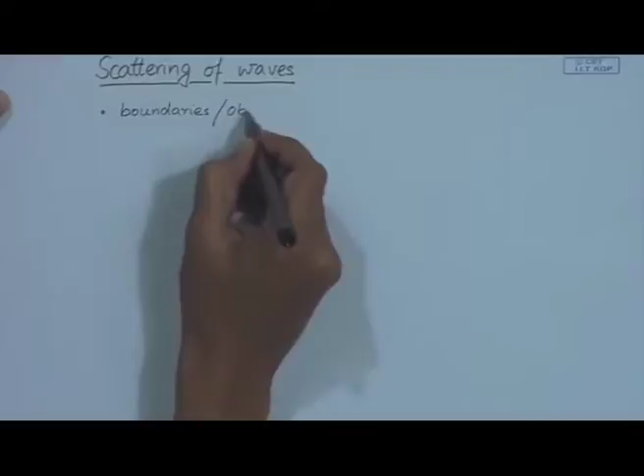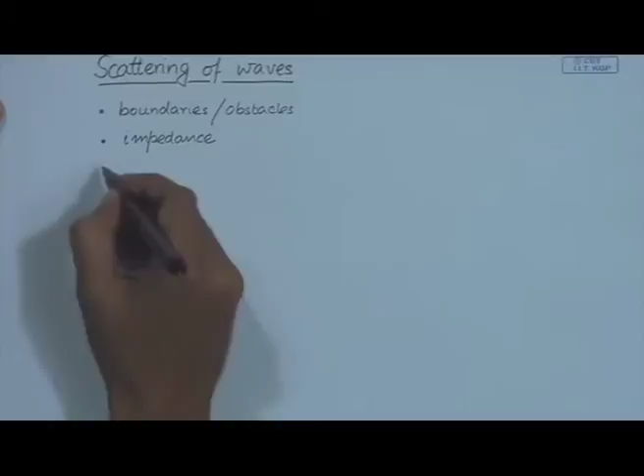So today we are going to look at this phenomenon of scattering of waves, and this will help us in understanding what happens when a wave front goes and hits a boundary or an obstacle or an impedance. So we are going to look at scattering of waves. Scattering can take place at boundaries or obstacles, at impedance - some finite impedances, let us say boundary damping - or it can take place at defects, which are defects or phases. When there is a difference of phase inside a material, then scattering will take place, and this scattering is of great practical importance for characterization and evaluation, non-destructive evaluation of materials.

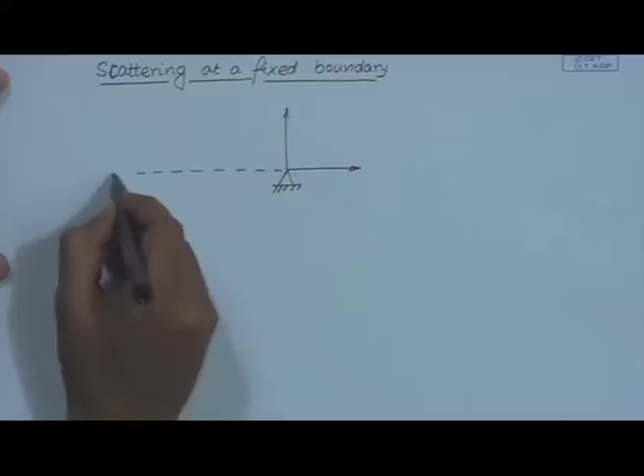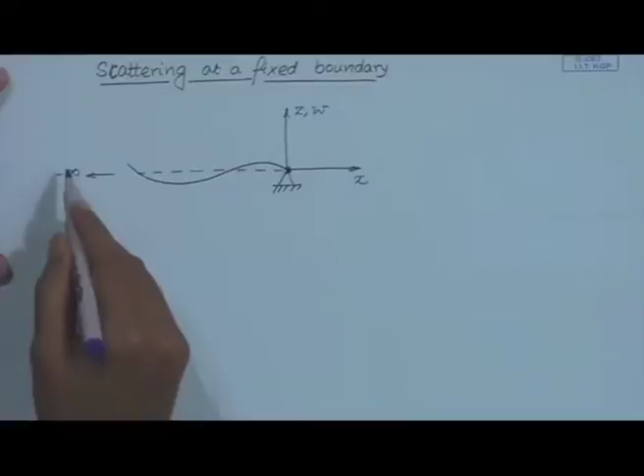So let us start with scattering at a fixed boundary. We will study this problem with the help of the example of a string, a semi-infinite string. So here we have a string which is fixed at this boundary, and we consider that a harmonic wave is incident from minus infinity.

So a positive travelling harmonic wave is incident at this boundary, and when this wave comes and hits this boundary, there must be a reflection, because the material ends here. So there must be a reflection.

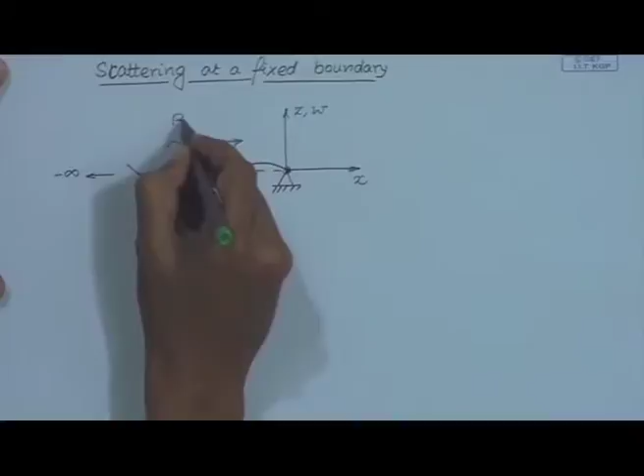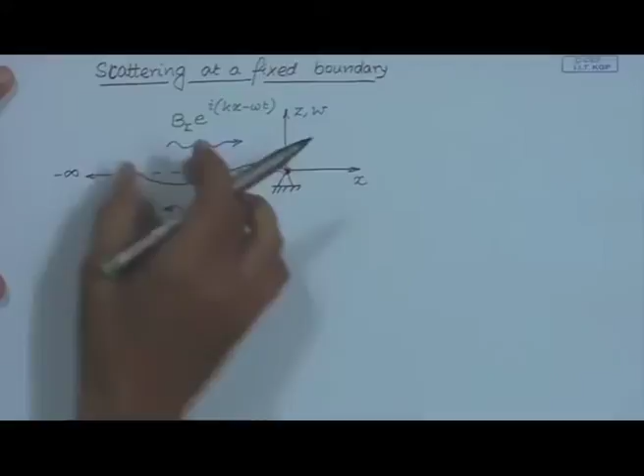Now we are going to consider an incident wave which is represented by this expression - this is the amplitude of the incident wave, and this is the space-time evolution. So this is a positive travelling wave.

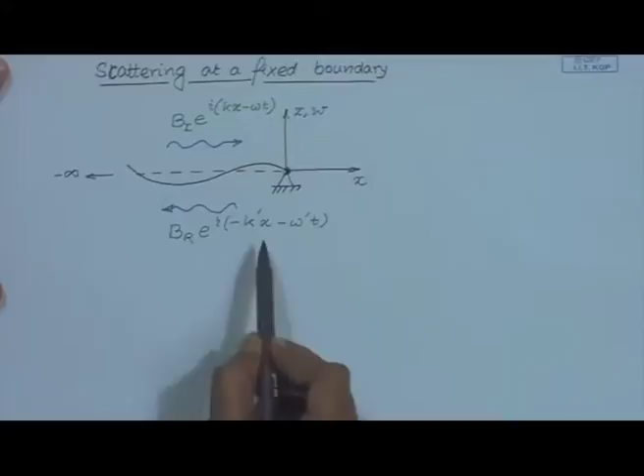Now when this wave reflects, let us consider that the reflected wave is represented by this expression. Here I have used k and omega for the incident wave, the wave number and the circular frequency of the wave, whereas for the reflected wave I am using k prime and omega prime.

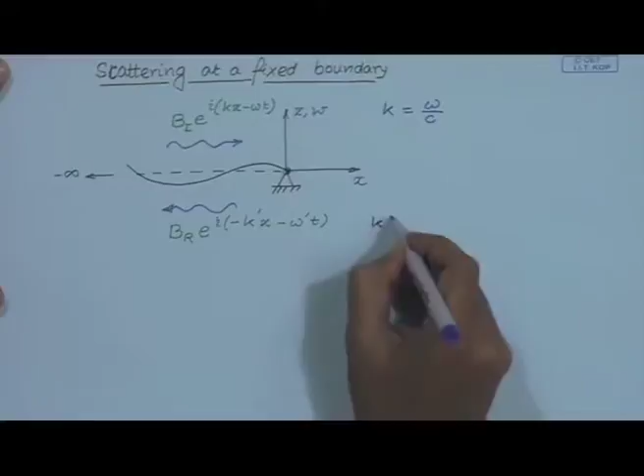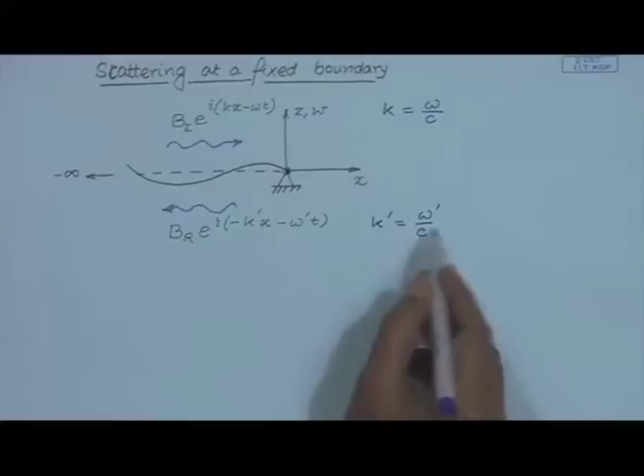Now this medium is the same, so we must have, as we have seen in our previous lecture, that k must be equal to omega over c, and similarly k prime must be equal to omega prime over c. Since the medium is the same, the wave speed in this direction or this direction must be the same, so the wave speeds must be the same. So k prime and omega prime are related by these relations.

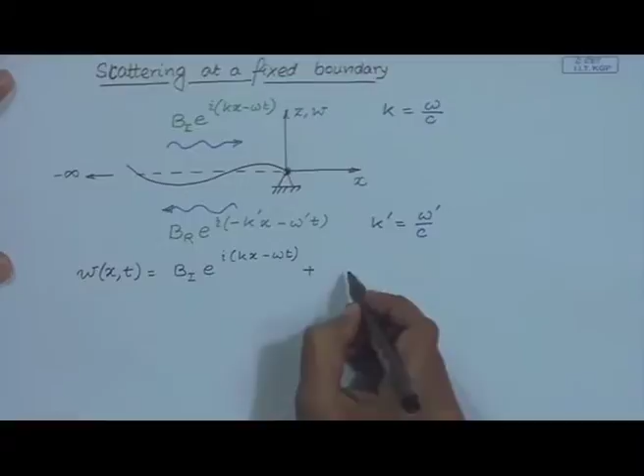So the total wave field in this string is the incident wave plus the reflected wave. Now what I am going to do is represent this amplitude of the reflected wave, which is B r, as a coefficient of reflection times B i, and there is this exponential part.

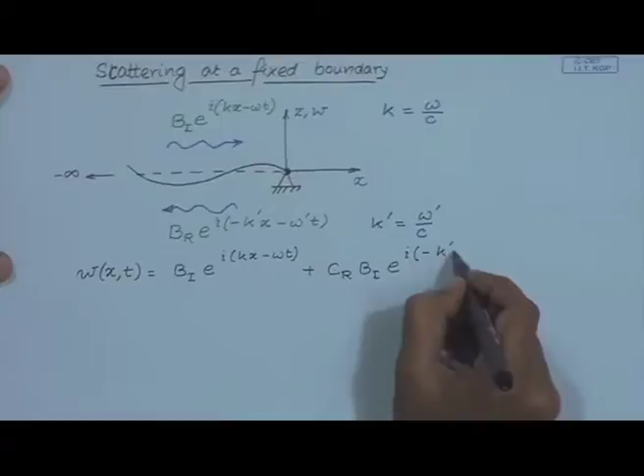So here I am introducing this coefficient of reflection. Now, the boundary condition at this fixed end is of course that this must be 0.

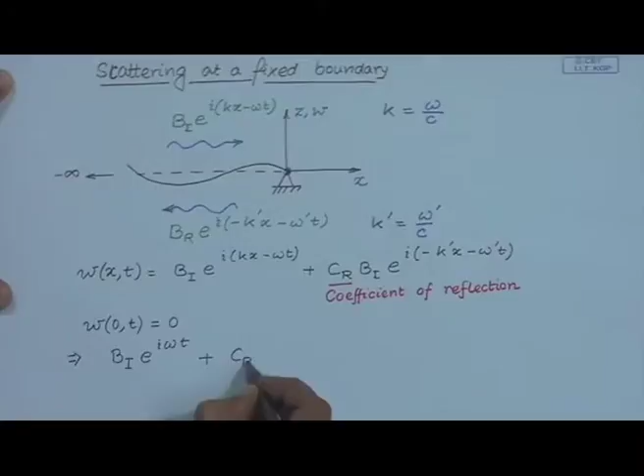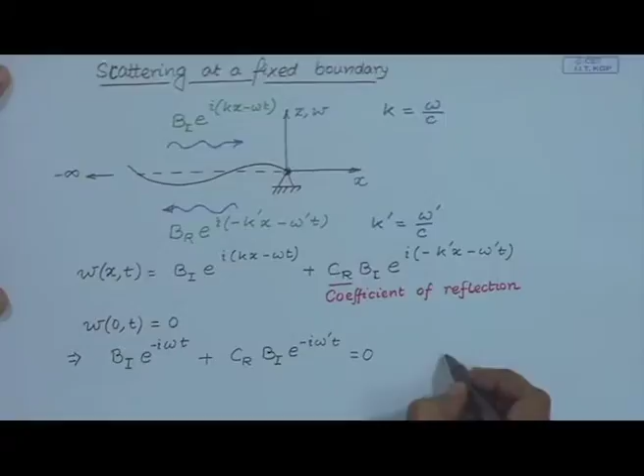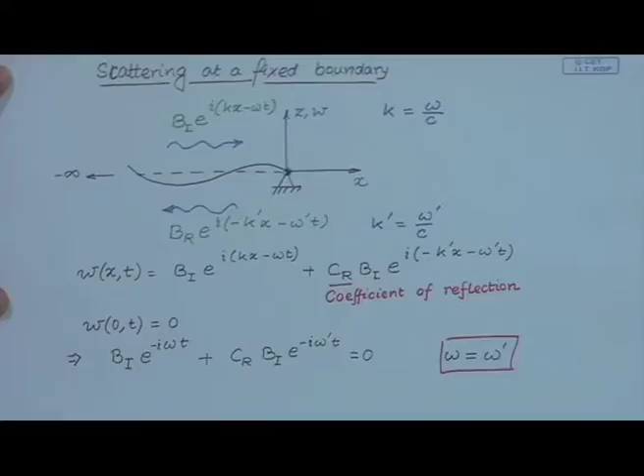So when I substitute this total wave field in this boundary condition, this gives me this relation. Now this relation has to be satisfied for all time t, and that is possible if and only if this condition is required - which means that the frequency of the incident wave must be equal to the frequency of the reflected wave.

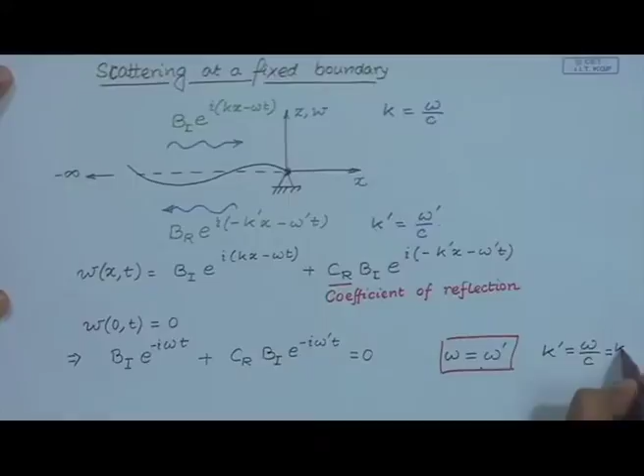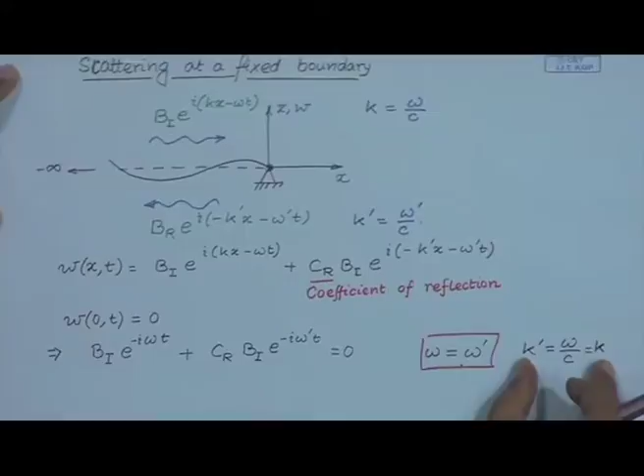Now immediately using this, we find that therefore k prime must be omega by c, and that is equal to k. So which means that the wave number of the reflected wave must be the same as the wave number of the incident wave, since the frequencies of these two waves must be the same. So once we put this condition here, what we have implies that C r is minus 1, because the other part is not equal to 0.

Now, this can also be written as minus 1, the reflection coefficient minus 1, which can also be represented as exponential i pi. This tells us that there is a phase inversion, a phase change of pi. So the reflected wave suffers a phase change of pi. The reflection coefficient equal to minus 1 implies that the wave undergoes a phase change of pi.

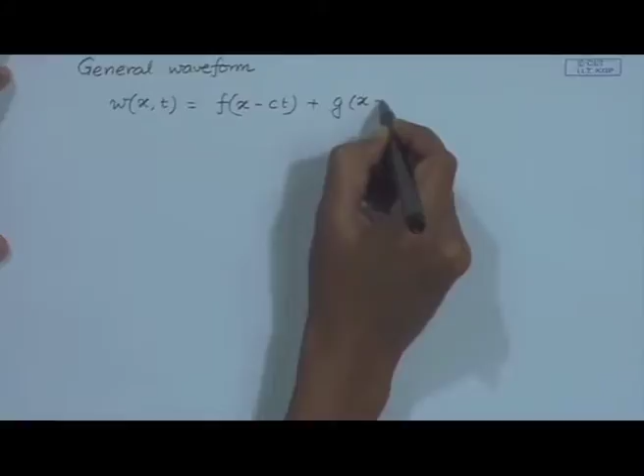Now, if you consider a general waveform for the same reflection process from a fixed boundary, then we have the wave field represented like this, as we have done before. Now, the boundary condition again is this, and that implies this is plus, so this must be 0.

So what we therefore have is g of z, let me write ct as z, is equal to minus of f of minus of z. Which means that our solution, the total wave field, becomes this. Now let us see what is this minus of f of minus z.

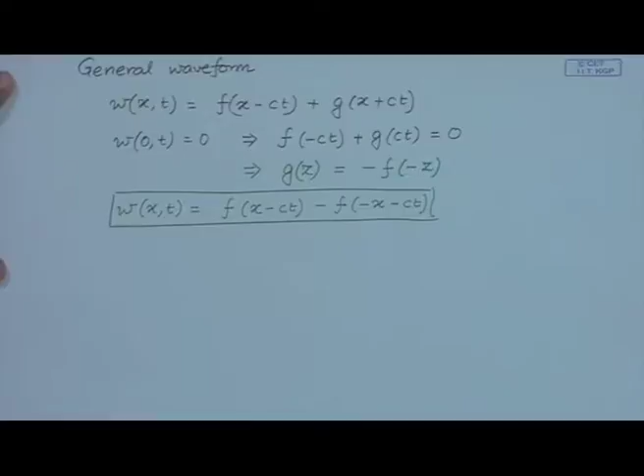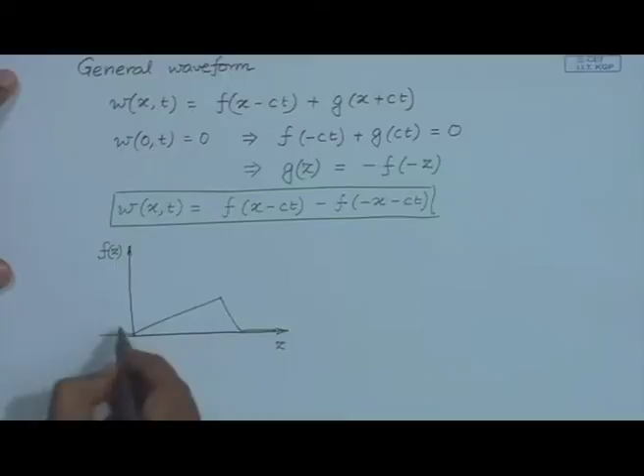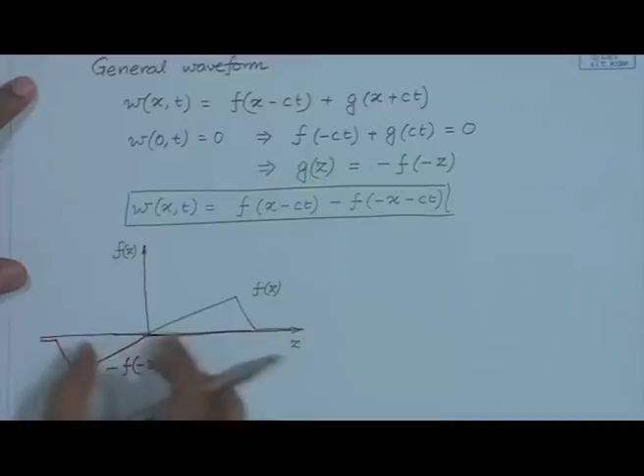Suppose this is f of z, then minus of f of minus z would be this. So if this is f of z, then this is minus of f of minus z. So the total wave field is a superposition of these two travelling waves, now one in the positive direction and the other in the negative direction. Let us see this.

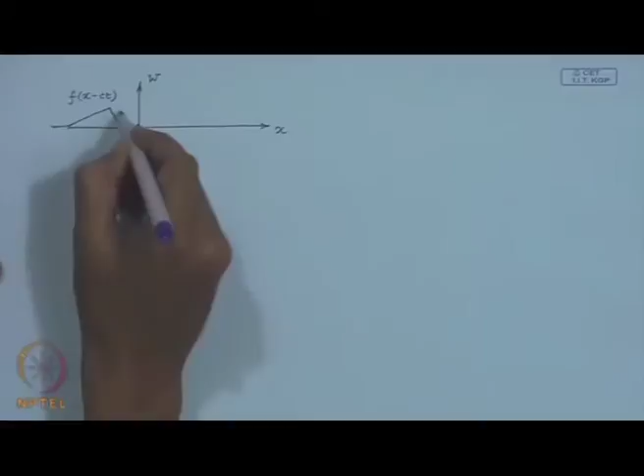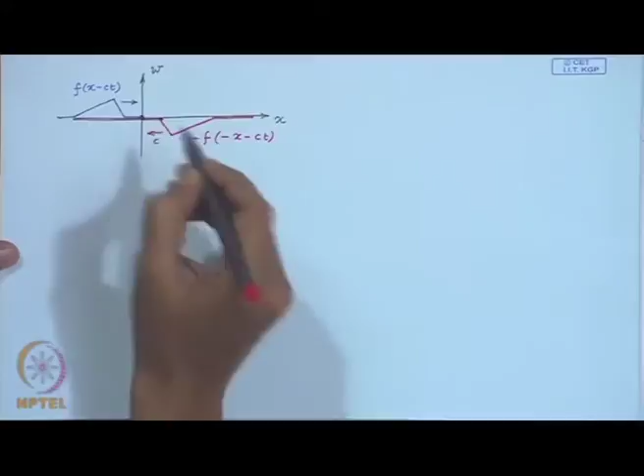Consider that there is this incident wave at this boundary, so this is f of x minus ct. This is moving towards the boundary, and imagine that there is a wave which is minus of f of minus x minus ct. This is travelling in this direction with the same wave speed c. So the superposition of these two is going to give us the net wave field in the string.

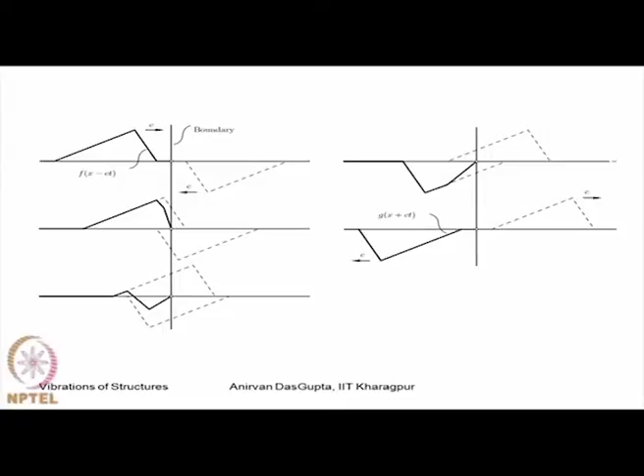So here I show an animation. A wave pulse travelling towards the positive x direction from minus infinity hits this fixed boundary at x equal to 0 and gets reflected. The figure here, the above figure, shows what is actually observed. That is how you will observe the string to behave.

Here I have shown this superposition of the two waves, which is giving the same solution. The second figure below shows this superposition of the two waves coming from two directions. You will find that these two superposing waves do not satisfy the boundary condition at x equal to 0, but after superposition, the sum of these two waves satisfies the boundary condition, the individual waves do not. That is how this reflection process takes place.

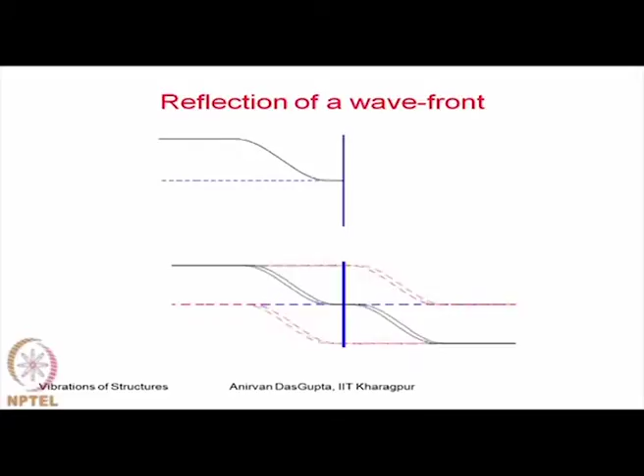So the superposition of these two waves is creating the reflected wave. The front comes, hits the boundary, and is reflected back. What we observe is that as the wave comes, it hits, and then the reflected wave is a superposition of these two waves that we have just discussed. Now, one is the incident wave, the other is the reflected wave. The reflected wave is inverted, as well as there is a mirror image created.

So we have minus of f of minus z. f of minus z is the mirror, and minus f gives us the inversion. So there is an inversion as well as a reflection. That is what we have observed.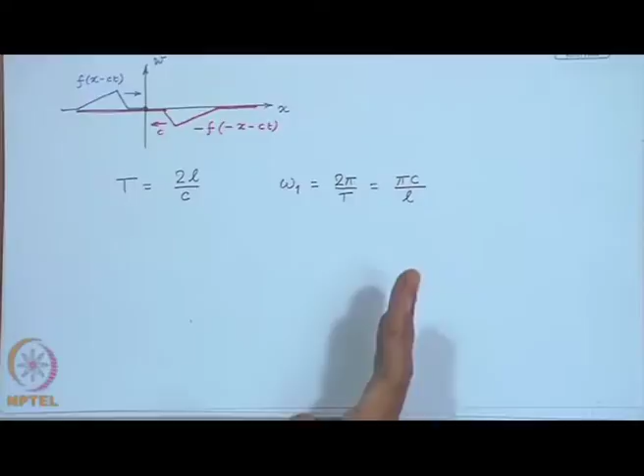So the frequency of a finite system can be estimated or calculated based on this wave reflection process that we have just studied. So for the fixed string we have been able to calculate the fundamental frequency.

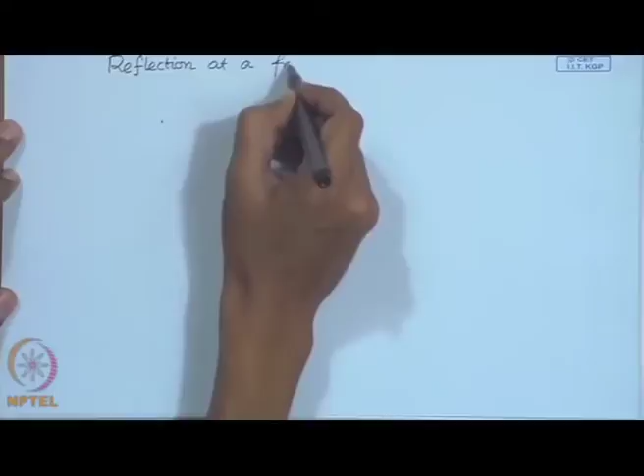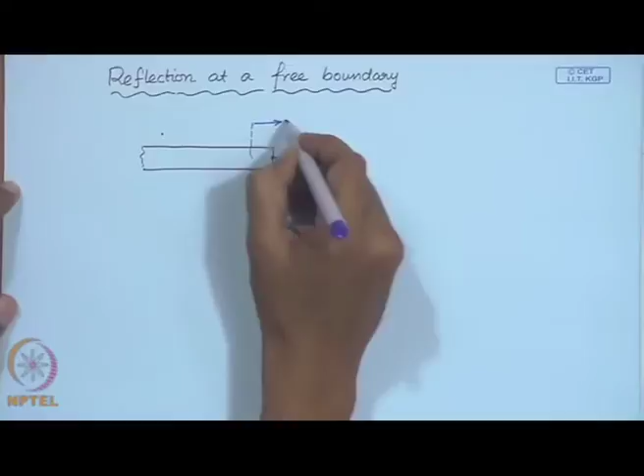Now let us look at this example of reflection at a free boundary. For this we will consider a uniform bar. At any point x of the bar, we have this axial displacement, so this is the field variable u of x and t.

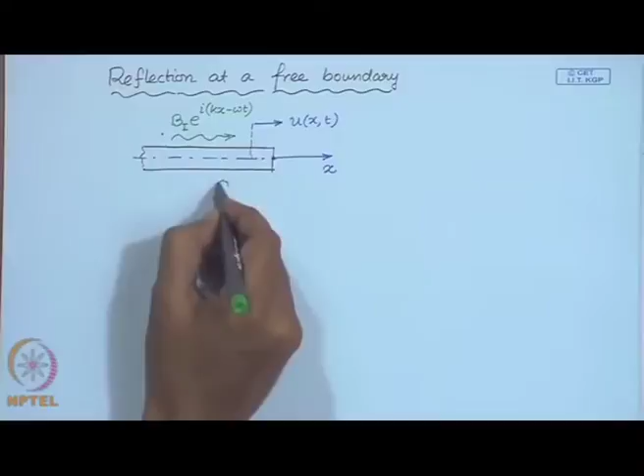So again we have this incident wave at a free end, this is a free end. So there is an incident wave given by this, and since the material ends here, there must be a reflection. So this we are going to once again represent as the reflection coefficient times B I times a negative traveling harmonic wave.

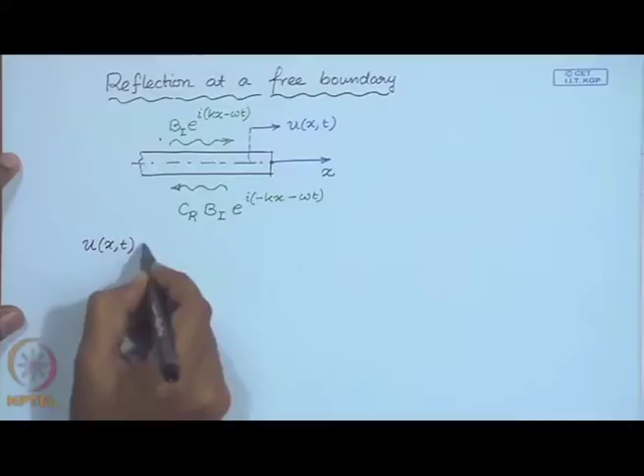And what we learned from the previous example, these k and omega must be the same as in the previous example. So the total wave field in the bar is given by this expression. Now the boundary condition: this is a free boundary, so for a free boundary we know that it is a force free or a natural boundary condition.

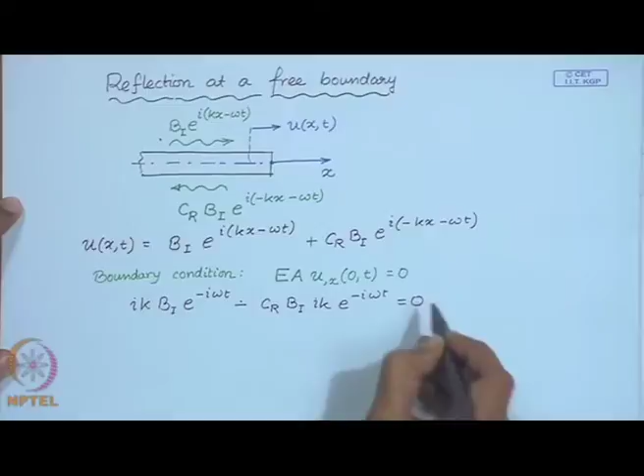So once you substitute this wave field in the boundary condition, and since this time function will not be zero, this has to be satisfied for all time, this would imply upon simplification...

So CR, the reflection coefficient this time, is 1, and 1 is nothing but exponential, you can write it like this. So this tells us the reflected wave suffers no phase change. So it is reflected as it is.

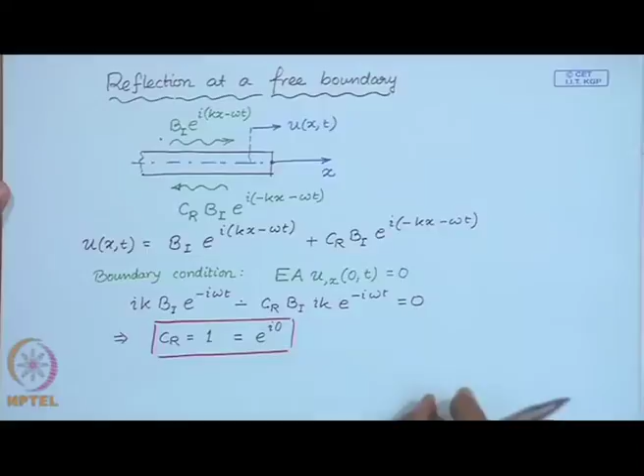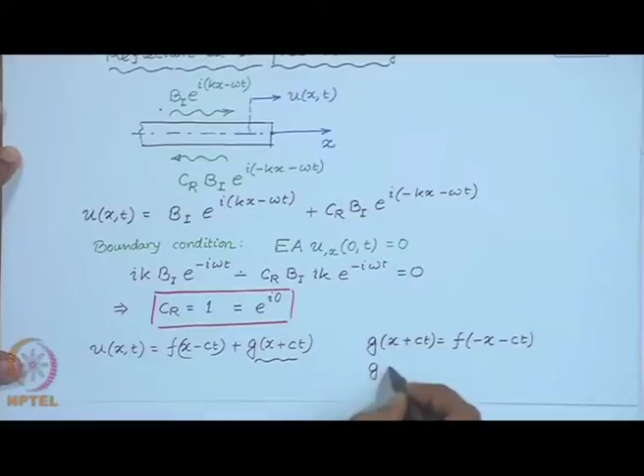Now you can perform the same analysis as in the previous example for a general waveform. If you consider and use this boundary condition, then you will find that the reflected wave can be represented such that g of z is actually f of minus z.

Now recall that for a fixed boundary, g of z was minus of f of minus z, and as we have seen, f of minus z is just the mirror reflection of f of z. So there is no inversion of the wave, as we have seen, there is no phase change.

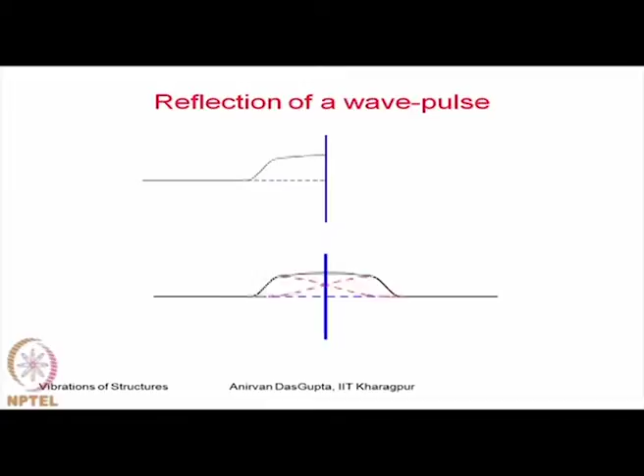So we observe here for the free boundary case, there is only a mirror reflection at the boundary.

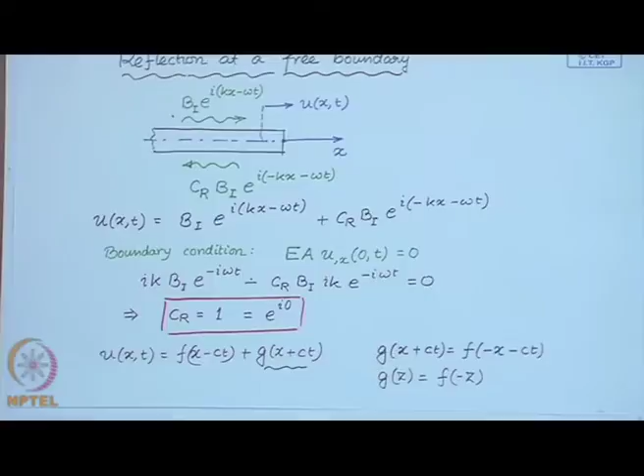Now if you calculate the total time that it takes, in this case you have a time period of 4L over C. This means the circular frequency is 2 pi over the time period, which gives us pi C over 2L, and this is the fundamental circular frequency of a fixed-free string or a fixed-free bar.

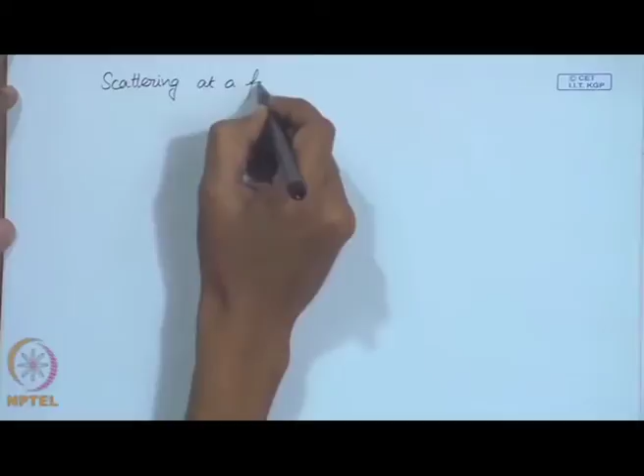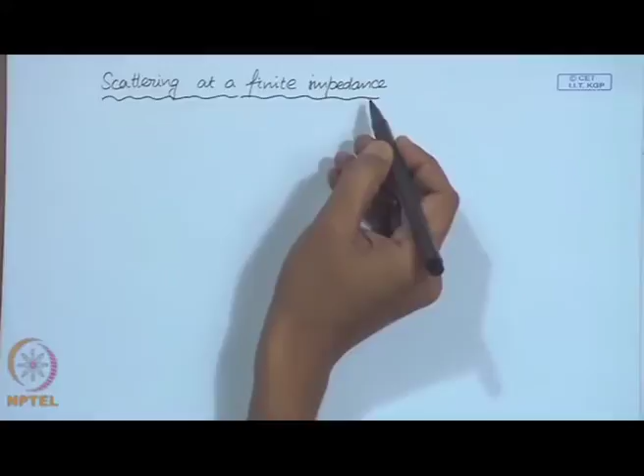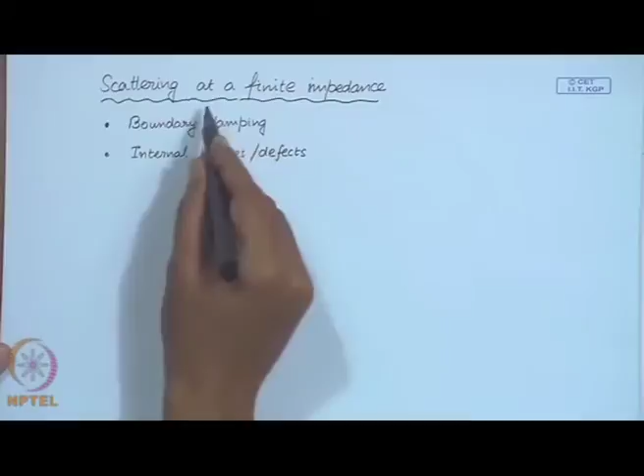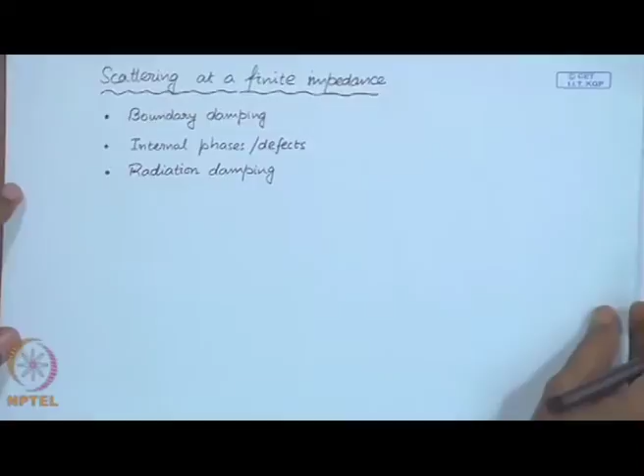This case arises when you have boundary damping, or internal phases in a material, or even defects. Then you can have scattering at a finite impedance. A third case occurs when you have radiation damping. So these are the situations where you can have scattering at a finite impedance, and we are going to look at these situations with the example of a uniform bar.

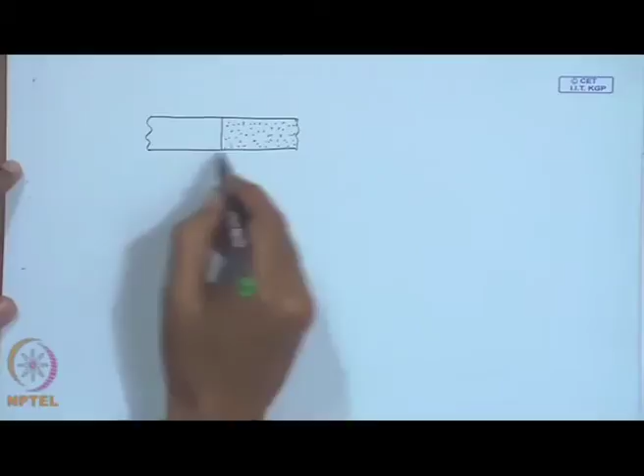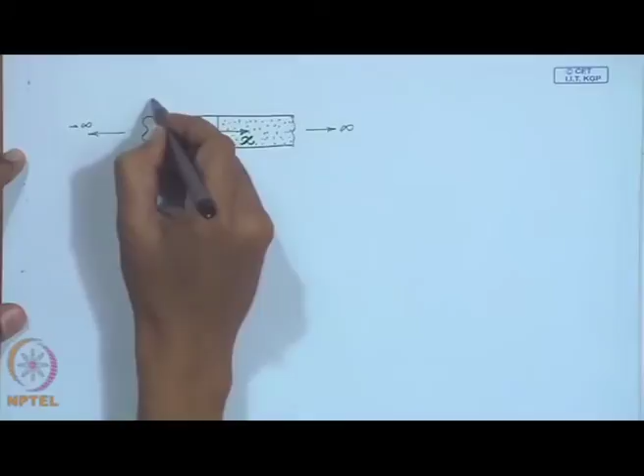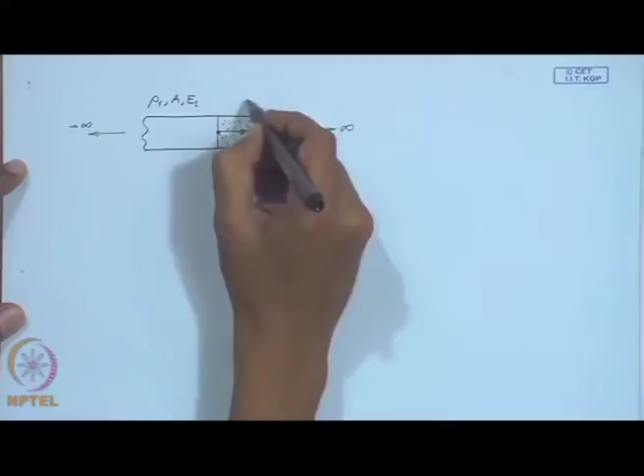This bar is made up of two materials, so we have a junction here. Material 1 has material and geometric properties like this, and material 2 is like this.

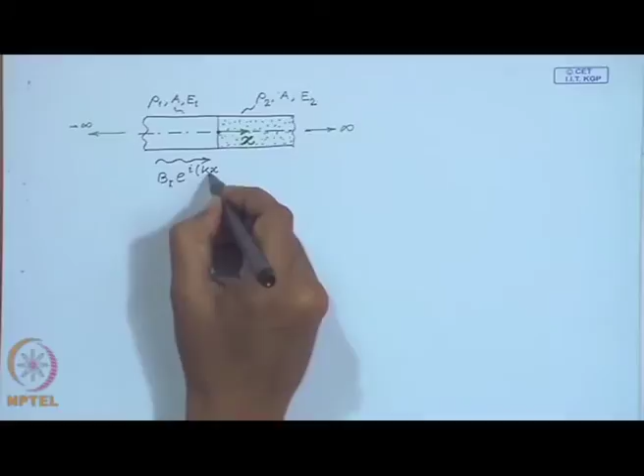Now, we consider that there is an incident wave from the left, so it is a right propagating harmonic wave. Here I am introducing a wave number k1 in material 1, and then there is a reflected wave which will have the same wave number k1, only it is a negative travelling wave, and there is a transmitted wave that propagates in material 2, with wave number k2.

Observe that I have taken the same frequency, as we have seen from our previous calculations that even if you consider them different, you will come to the same conclusion that these frequencies must be the same. This comes from material continuity, so the frequency must be same, but the wave numbers may be different. Now, in these two different materials, the wave number, frequency, and wave speed are related like this.

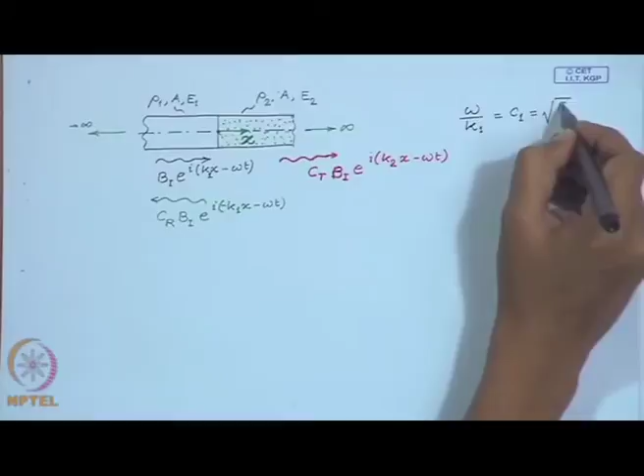So C1 is the speed of axial waves in material 1, given by this relation, and similarly for material 2 we have this relation. Here we have this as the coefficient of transmission, Ct, and Cr is the coefficient of reflection.

So therefore, the total wave field in material 1 is given by this expression. Similarly, the total wave field in material 2 is nothing but this transmitted wave.

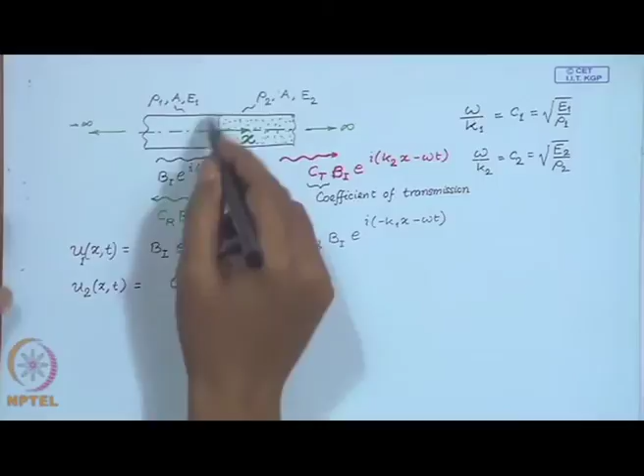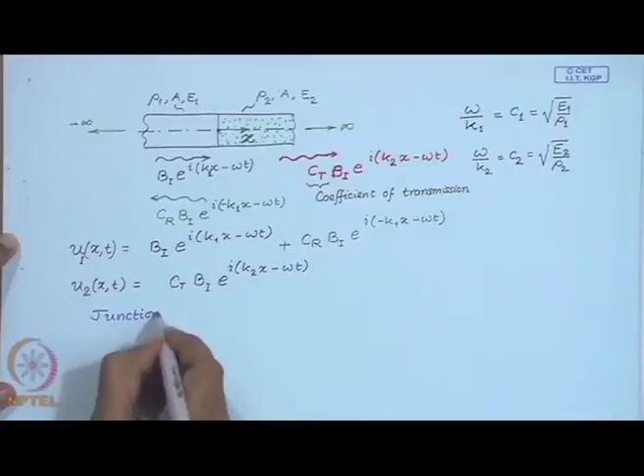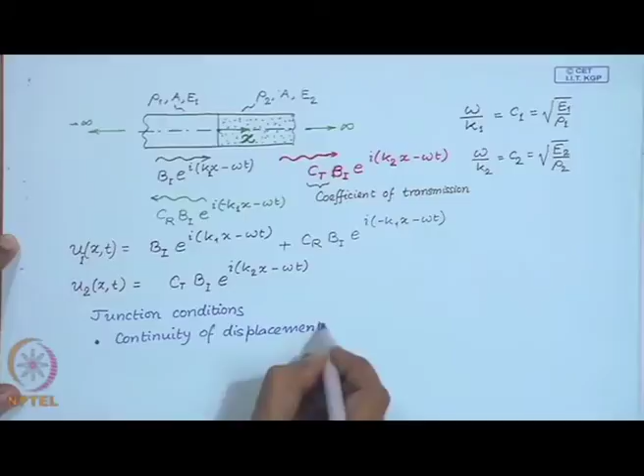Now, at this junction we must have some junction conditions. The first junction condition comes from continuity of the material, so this junction should not break - material continuity has to be maintained. So there are two junction conditions: the first is material continuity or continuity of displacement, and the second comes from Newton's third law, which says that the force must be continuous, equal and opposite at this junction - continuity of force.

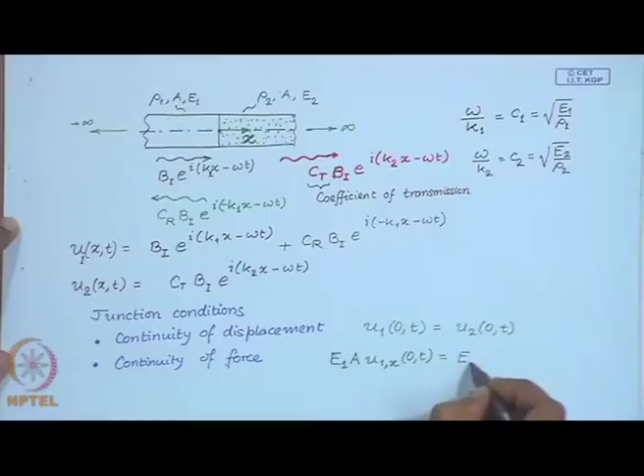So let us write down these junction conditions. The displacement junction condition tells us that the displacement of material 1 must be equal to the displacement of material 2, and the force continuity can be written as the force on material 1 must be equal to the force on material 2.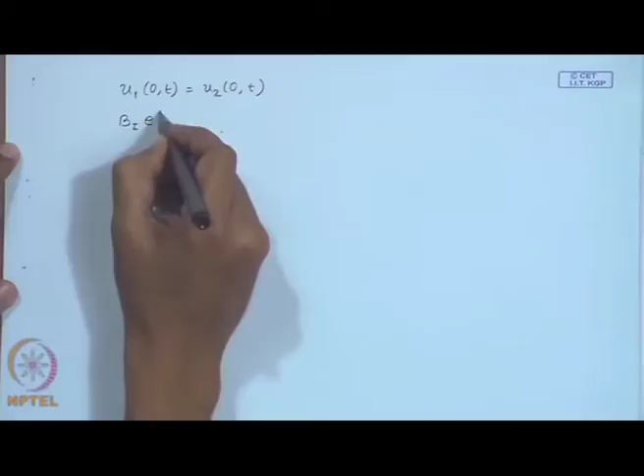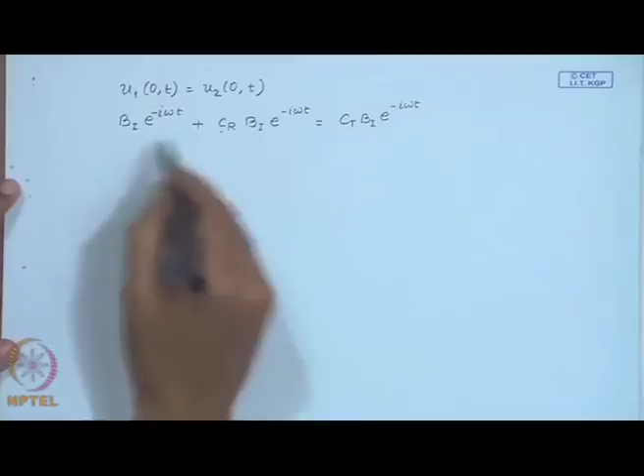So these two conditions, when we substitute our solution or the wave field into them - let us see first the displacement condition. If you substitute u1, and since all these frequencies have to be the same as we have already assumed, this implies this is the condition that we get from continuity of displacement.

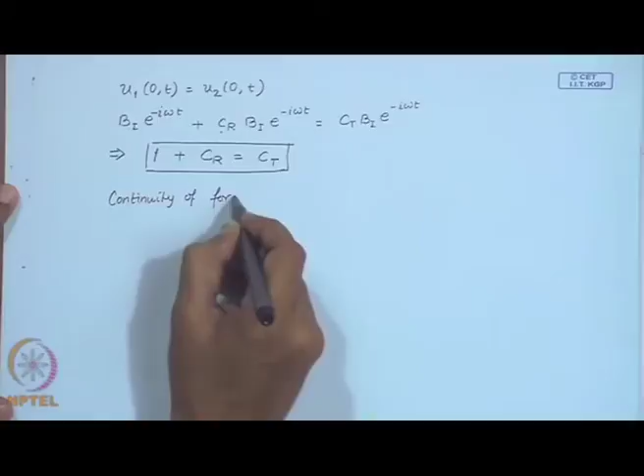Similarly, from continuity of force, if you do the same calculation, you can easily obtain this, which can be written like this, where we have used omega over k1 as C1, and E as rho 1 c squared - so 1 c squared comes extra in the denominator, giving rho 1 c 1. So this is the condition that we obtain from continuity of force.

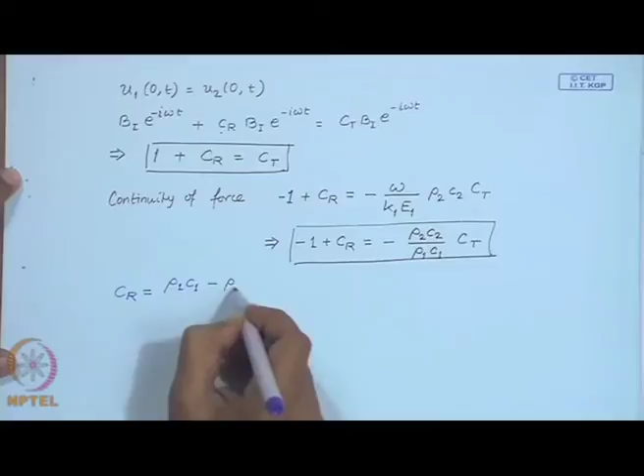Now, using these two conditions, you can very easily calculate the reflection coefficient - this is the reflection coefficient - and similarly you can calculate the transmission coefficient.

So, we have calculated the reflection and transmission coefficients. Now, let us make some observations based on this. You will find that this transmission coefficient is non-zero, which means some part of incident energy always goes into material 2.

Now, this reflection coefficient can be 0 only when rho 1 c 1 equals rho 2 c 2. This can happen in various ways. One is there is a single material, the material is the same, so there is no reflection, that is very obvious.

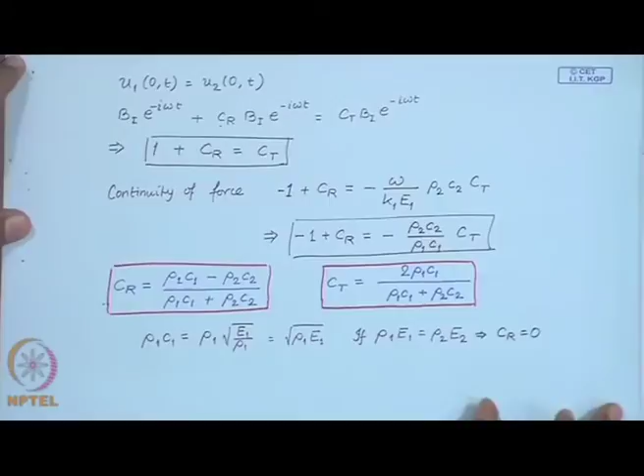Now, this rho 1 c 1 can be written as... So, if we have two materials for which rho 1 E 1 is equal to rho 2 E 2, then the reflection is 0. But this is a hypothetical situation, a theoretical possibility that this product is the same for two materials, but it may not occur in nature. So, when we have this junction of two materials, there is some transmission, there is some reflection.

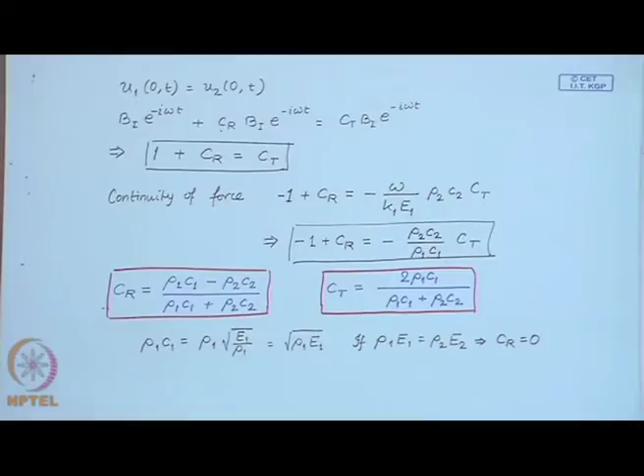Now, this case is an important example for certain applications. For example, when we do ultrasonic testing of materials, we have the ultrasonic transducer which we put on the sample, and we expect that these ultrasonic waves will propagate into our sample completely. There should not be any reflection from this transducer sample interface. So, let us look at this.

So, this is same. We have this transducer sample interface, and we want that all the waves that we generate here should enter into the sample. There should not be any reflection right from this interface.

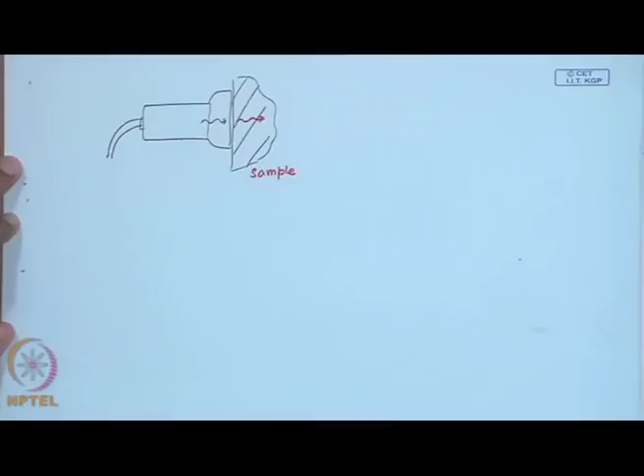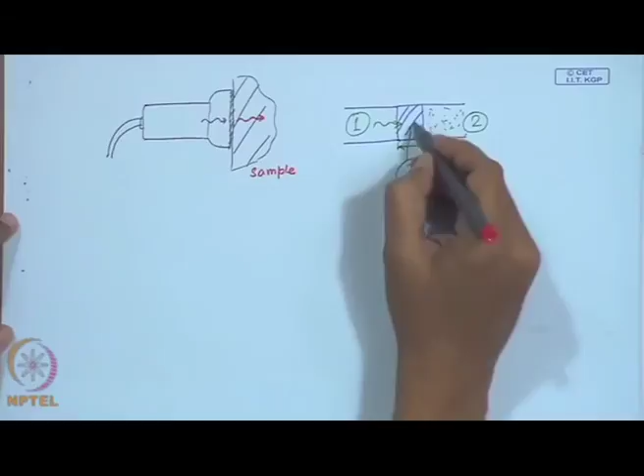So, what we usually do in this case is we put a thin film of a third material. The scheme is like this: here we have a third material at this interface. This is material 1, this is material 2, and in between we have a third material, and we can adjust the thickness of this material so that there is only transmission and no reflection. We can adjust the thickness so that there is no reflection, so there is a complete transmission. This is very useful for such applications.

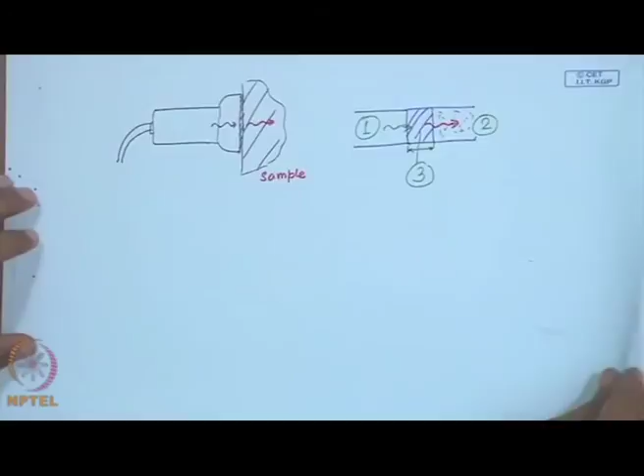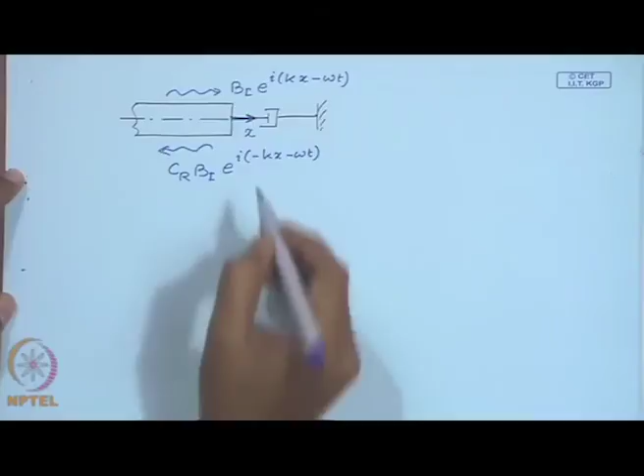Now, let us consider a second example of scattering at an impedance. This example we have seen before. This is a bar, a semi infinite bar with boundary damping. So, once again we have an incident wave, a reflected wave, and we consider that this damper has a damping coefficient d. So, the total wave field is given like this.

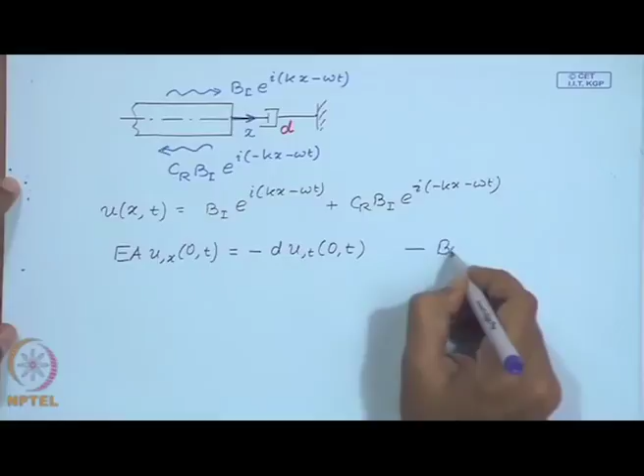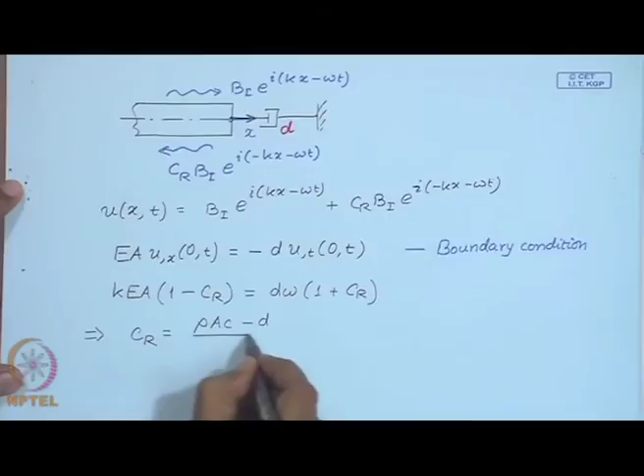Now, the boundary condition is - so, this is our boundary condition, at x equal to 0. Now, when we put this expression, the wave field in the bar, into this boundary condition, we can easily arrive at this expression. So, from here we can calculate the reflection coefficient like this.

Now we observe some interesting things. When d, the damping coefficient of this dash pot, equals rho a c, the reflection coefficient goes to 0, which means there is no reflection in the bar. So, the wave comes and gets completely absorbed in the damper. Now, what is this special value of d? As you recall, the impedance of a semi infinite bar is also rho a c.

So, what this wave feels is that there is a semi infinite bar attached at this point, as if this bar has been extended up to infinity. So, the whole wave goes into that. It gets completely absorbed at this boundary for this very special value of the damping coefficient.

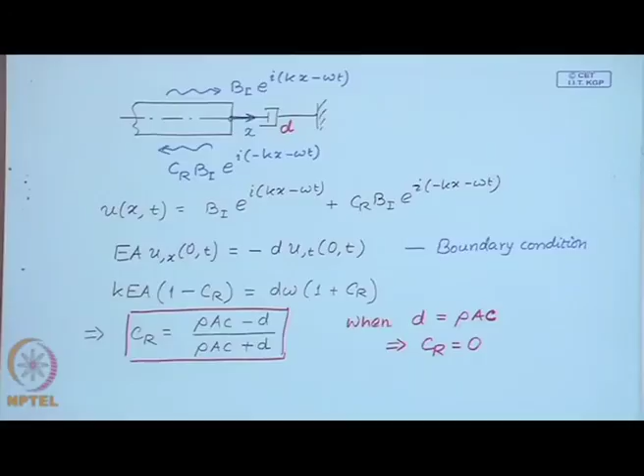So, this is the reason why, when we did this modal analysis, when we solved the eigenvalue problem for a bar with boundary damping, we found that for very special values of this dashpot there are no eigen frequencies or eigen values.

So, now we understand that the concept of eigen frequencies, eigenvalues, or modes occurs only for finite systems, but this special value of damping has almost made the bar infinite in the positive x direction. So, the concept of eigen frequencies does not exist, and the kind of solution we assume for modal analysis does not hold. In such special values of this damper, we have a perfectly absorbing boundary, which is sometimes very important in applications. For example, if you want to absorb sound in a room, you must design the wall dampers or absorbing material on the walls, so that it becomes a perfect absorber.

So, what we have looked at in this lecture: we discussed scattering of waves at a fixed boundary, at a free boundary, and at interfaces with finite impedance, and we looked at some interesting results and made some observations based on what we discussed today. So, with that we conclude this lecture.